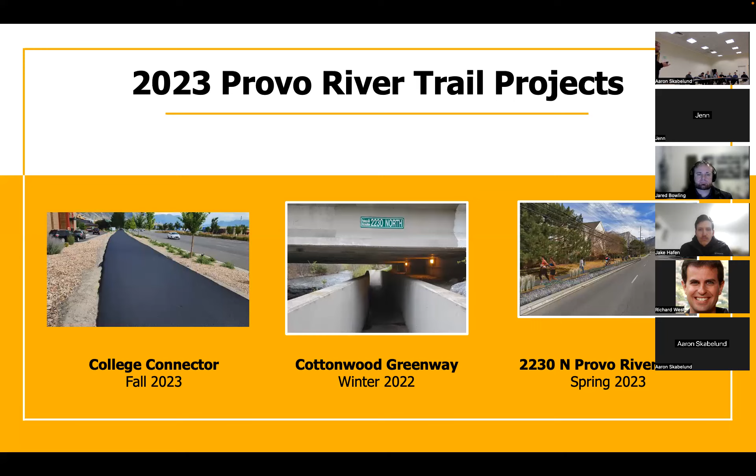Go ahead and advance the slide—we're going to wear your finger out going through these, no pressure, I'll keep it quick. So College Connector Trail is a half mile resurface. It's supposed to be really simple: grind off some asphalt on top, get rid of the cracks that were there, and lay down some fresh asphalt.

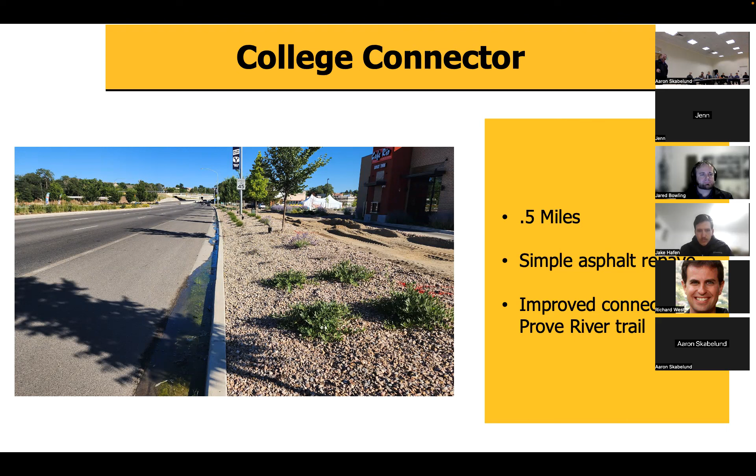But if you see in this picture, right here, there's a lot of water—been there a while. What was happening is the adjacent property owner had left the irrigation running for at least 30, 45 days. It saturated the ground, so when they went in and removed the asphalt, it rutted up the trail. Go to the next slide—another example of how rutted it was. These were like 2 foot deep ruts from the equipment that came in to remove that.

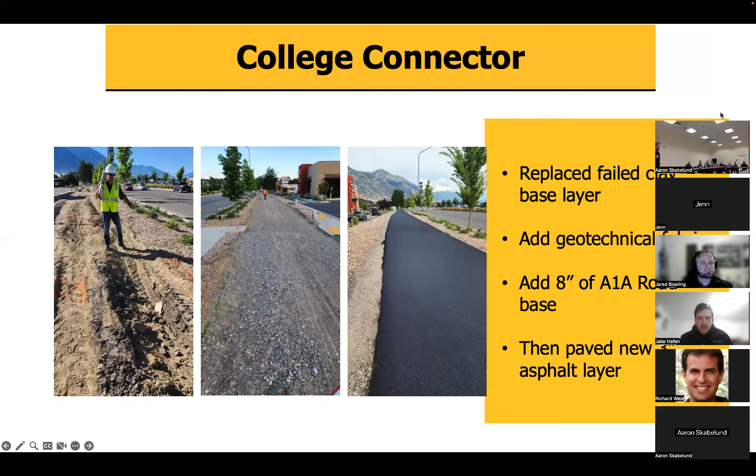We had some testing performed, and it required stabilization underneath the asphalt with geotechnical fabric and 8 inches of A1A class road base. Then we were able to come in and lay that fresh asphalt. Discovering that problem with the sub-base soils explained a lot of what you were seeing on top of the trail, cracking, because there's a lot of movement.

Sorry, where is this again? This is right up next to the Cafe Rio on University Parkway, where the new—we call it the mix, but they have another name for it—River's Edge, thank you. So I know the cracking happened there as well.

As you go south or east, there's also cracking. Is it because of the trees? Are you saying south of the bridge? Yeah, south of the bridge, like once you cross the river right there, southeast. I think you guys fixed it, but I'm just wondering, was that a tree issue?

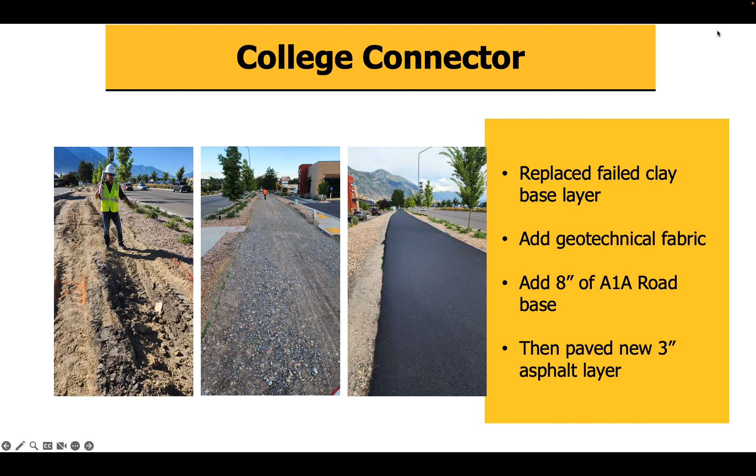I was on that this morning. My dentist is over there, so it's very... yeah.

So as part of that section, we created a new connection to the Provo River Trail. When you were headed south, you used to dive down right on the sharp right-hand turn right underneath the pedestrian bridge above you. We saw an opportunity to improve line of sight issues and ADA accessibility through here, so that we're now at grades less than 5% through this area.

Another design feature - I'll be honest, I saw this opportunity because I was out here multiple times before construction and saw people from Raintree just cutting across this section, across the lawn, to connect with College Connector Trail. They wore a beaten path, and it's like, that's where we need to put this connection.

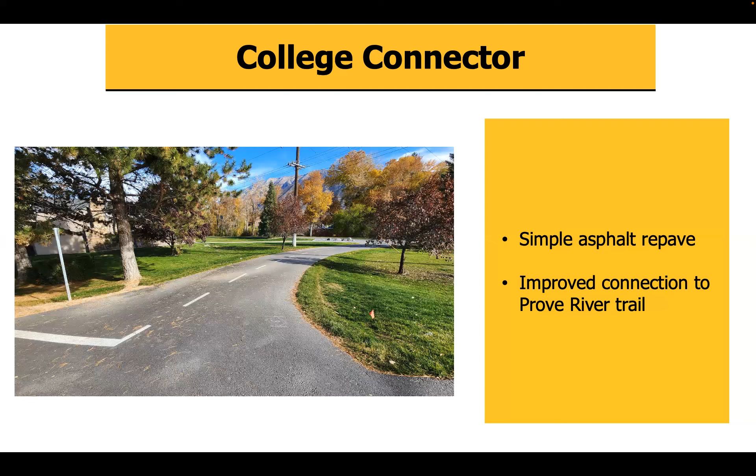So we follow the users. We're looking at our plans, but we're also looking at the real world to make these adjustments and bring it all together. Let's advance.

This one made sense because of the grades and such, and the connection that I'll show in a second on College Connector. So that's College Connector Trail.

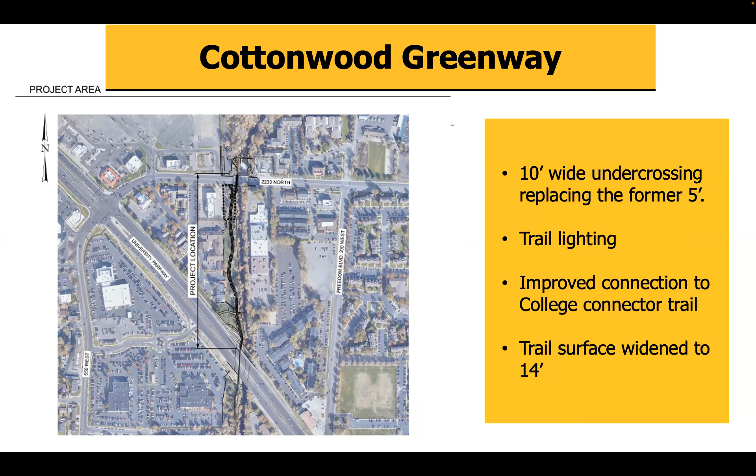So when we do these projects, there's a lot in the planning, a lot in the engineering. This is showing the north end of this project scope, with the crossing underneath the bridge of 2230 North along the river. There's a lot of stakeholders involved, and we're talking about the Provo River - it's not just Provo City, it's not just county, it's not just federal.

You've got multiple agencies involved with the environmental factors of the river, the wildlife, fish, canal, water share owners - all of those. There's so much that plays into this.

Our objective is to widen Provo River Trail to 14 feet with a shoulder on either side. In this particular section at 2230 North, we could not get that width because of the narrowness of the bridge and the river flows that needed to happen next to it. Let's go to the next slide.

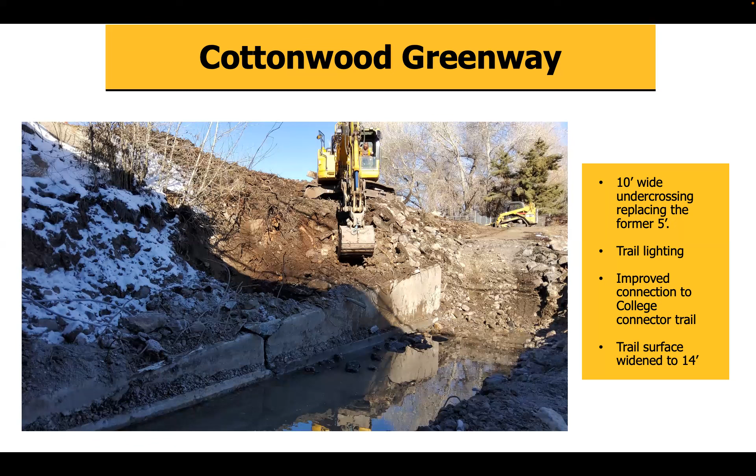This is with the old structure removed. We had to do quite a bit of engineering to shore up this bridge to keep it in place so it doesn't move. Not every bridge abutment is deep enough to do exactly what we want, so we had to drill into the hillside underneath the bridge abutments and stabilize it before we excavated to our depths, because another objective is to have at least 8-foot clearance overhead between the trail surface and the girders of the bridge above, or anything overhead of our trail system.

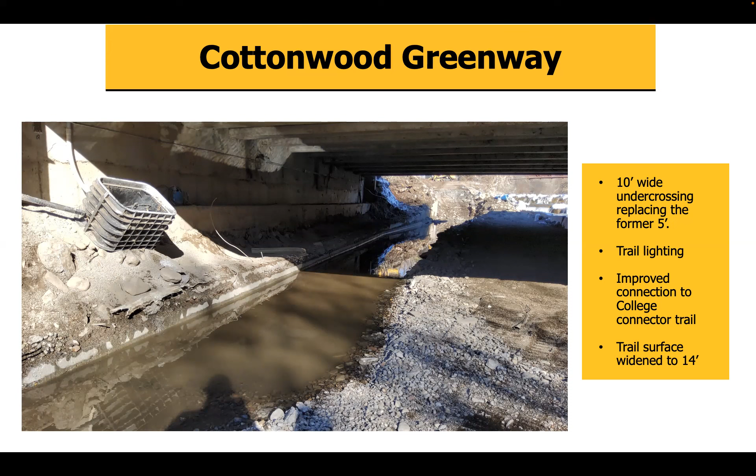Go to the next slide. What was the depth or height before? I think it was 5.5 feet wide, and the clearance was 6.5, maybe 6 foot 8. So we had to go down deeper to both build our structure that was improved underneath it, as well as increase the overhead clearance. Wow.

So this is what we have today. Let's just go through a couple of these.

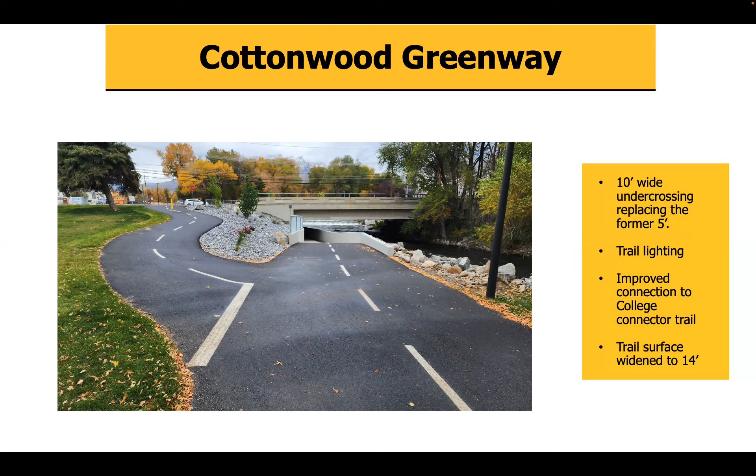This is the new intersection going out to College Connector here on the left. It's a 4-way - we have a 5th connection to this commercial building here, which we worked with these adjacent property owners to understand the connection to the trail system.

I didn't build anything they didn't want. They specifically requested only this connection. We worked with them to do some land exchange so that the trail is within Provo City property and not through their property.

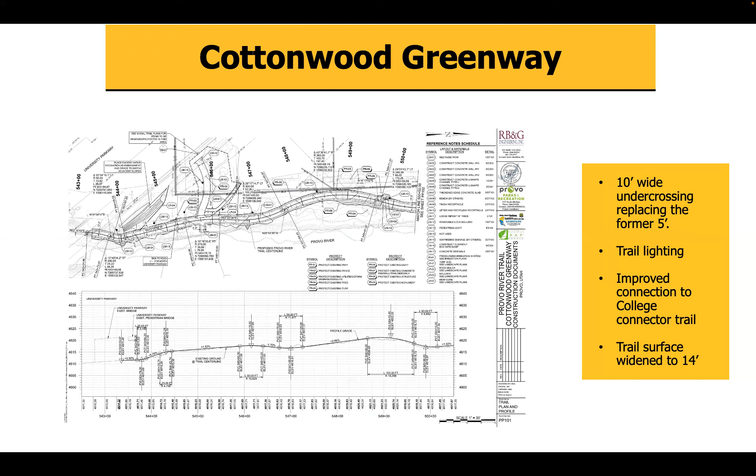Let's go next. This is the other project that was just adjacent to Cottonwood Greenway, and it goes to the north. It's a very long section of trail, 1.7 miles of surface to be replaced here. Next slide.

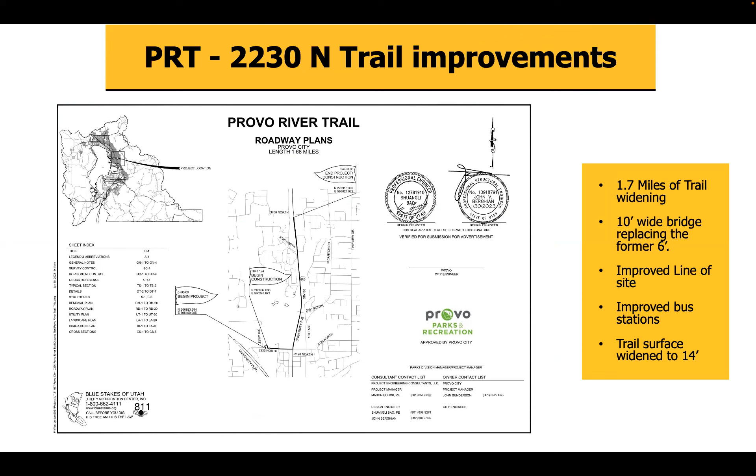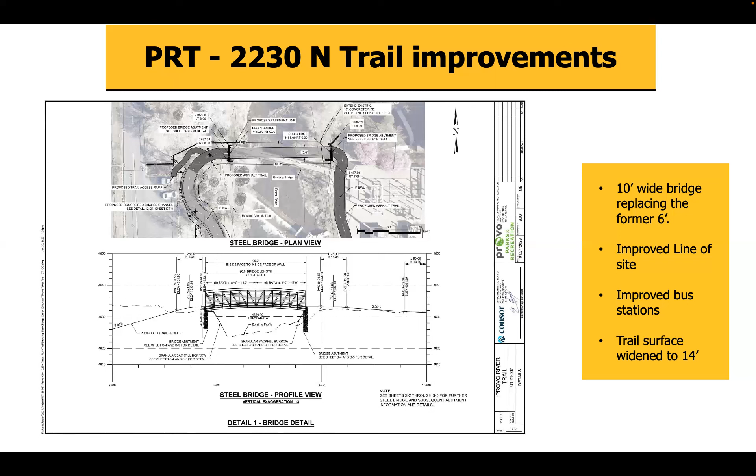Let's go to the next slide.

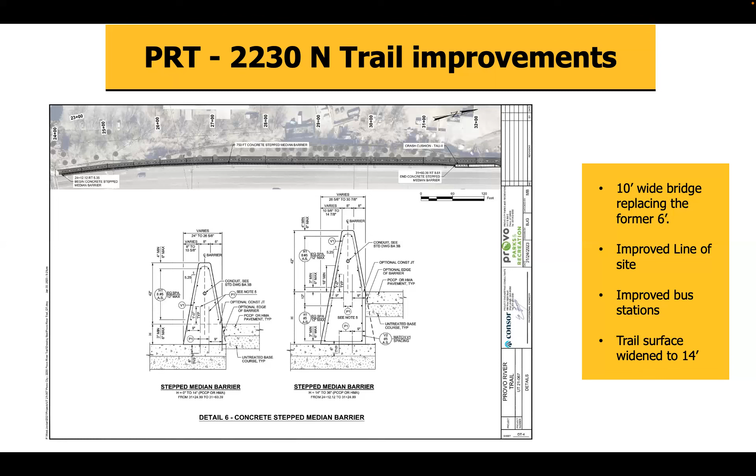Next slide. Can I just comment? I live right by that intersection, and I see accidents there all the time, so I really appreciate the safety measures. The one coming into the motion picture? 2230 and University, where you decreased the sidewalk? You see car collisions all the time there, or on the trail? Yeah, car collisions is what I'm talking about. So that separation helps. I've got a photo of it, we'll get to that in a second.

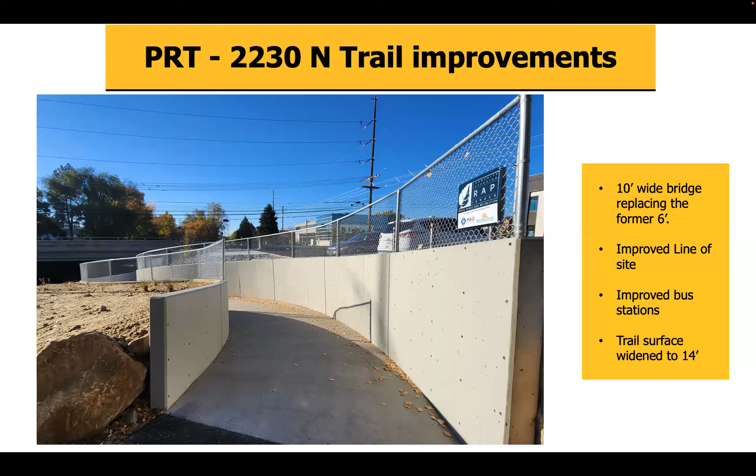As part of this improvement, the grade has to drop, and I wish I could get 5% slope on everything, but we have fixed points. We've got the depth we need to go underneath the bridge, and there's a pedestrian bridge up here with not a lot of run to get there. We've got parking lots next door and a river on the other side, so we're boxed in, but we did what we could to sweep it out and get a better approach angle and grade to the bridge. Before, it just came up through here with a right-hand turn. So we worked with BYU Motion Picture Studio for the property needed to do this.

And the bridge is much wider too, right? Yeah, great point, it's a 10-foot wide bridge. The other one is about 6. What is the grade? The grade at the steepest is 12%, and it was 22% before. That's an improvement.

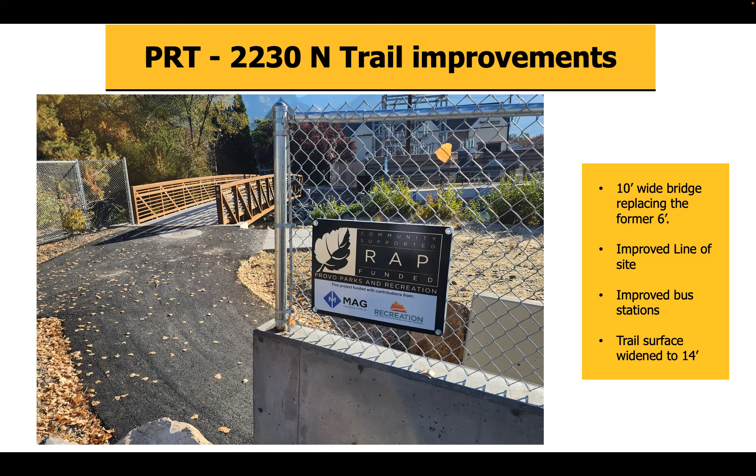This is a close-up of the bridge. We went from a wood deck to a concrete deck, which allows our maintenance team to use our plow equipment on the trail and get right across this instead of having to hand shovel the wood plank decks. This has now become a new standard.

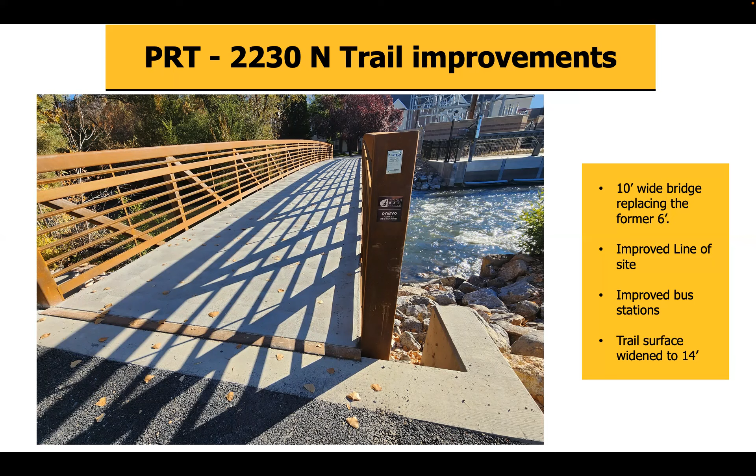And it notes improved bus stations. Oh, that's another thing—I'm sorry, I just copied this slide and changed the pictures. There's a new repair station here, right in front of Motion Picture Studios. Again, there's that U-channel below it.

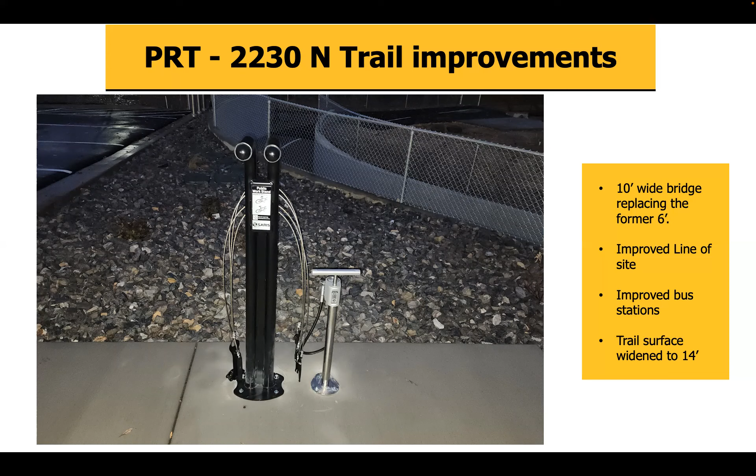Some picnic table pads were added in that area too, because it's a great spot to use as a trailhead—take a break if you're on a stretch of the trail already. There's some good eateries in that area too, with commercial development in River's Edge.

So this is that median barrier wall, and you can see our grade, we didn't have to build this up. The sidewalk used to be right about here. If I was to widen that surface, I would have had to push a lot of dirt out here and steepen the grade coming down that wall. I had no engineering on that wall to be able to do that, so we instead dropped the grade of the trail down and were able to get the widths we could get.

The narrowness here at the BYU tunnel was a fixed point. I couldn't go any lower because there's a structure underneath it. But after that, we flare out to 12 foot. I think right down here was 8 foot, but the contractor only had 7 foot 8 inches, so if it goes back, widen it to 8 foot. That was a design criteria to get that width right down here, carried to the fence, and then it flares out to 10 foot and then to 12 foot eventually until we get past the north of the Riverside Country Club entrance, then it goes to 14.

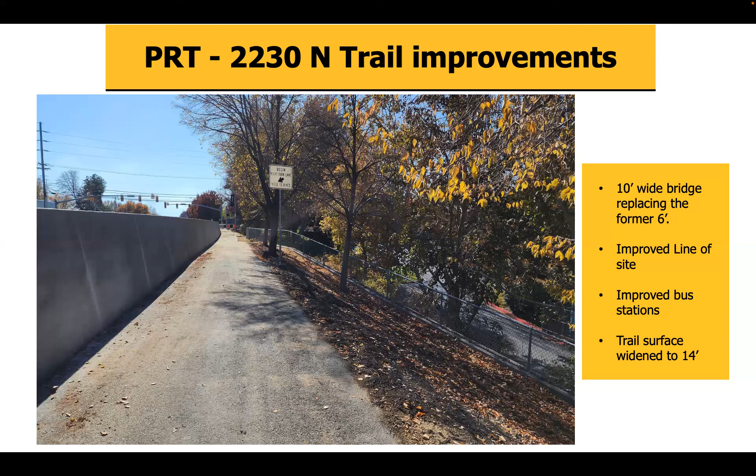Let's go through next. This is the bus station. Look at that. So what we did is I included in the contract to improve the bus stops from just a post. This one had a shelter on it and they're replacing it, I don't know if it's been replaced yet. But the two other points at 3300 North and 3700 North did not have bus shelters or pads, it was just a post in the ground. We worked with UTA, they are providing the shelters, and we provided a pad for them to build on. So those improvements happened at the same time as the trail.

We had to work with the Riverside Country Club to relocate their fence back to accommodate the trail. They were a very good stakeholder and partner in this improvement. They let us tear up their frontage and put things back as best as our design had laid out.

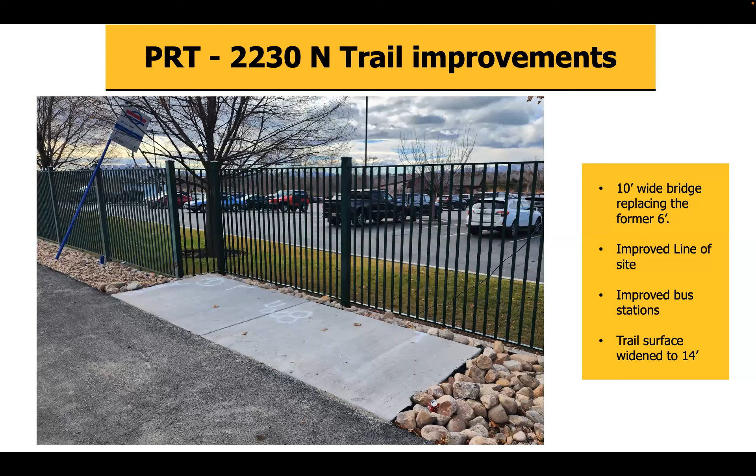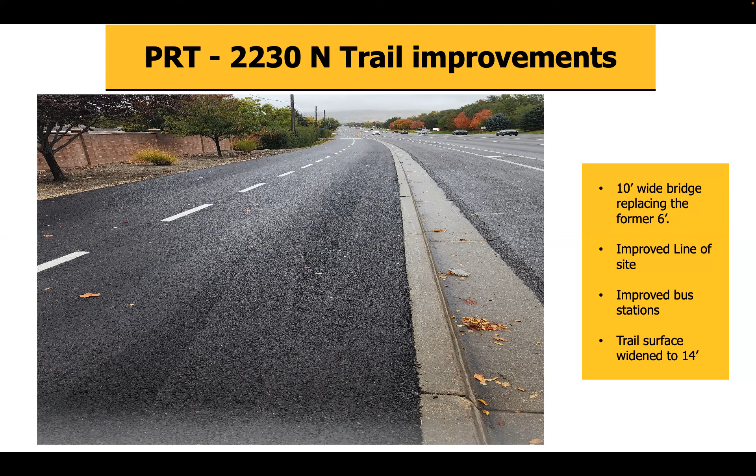This is looking to the north, just past Riverside Country Club with the condos to the north of it. And I got one more photo for this section. A gorgeous place to live, with great access to this trail. I love the hornbeam trees that are here for St. James.

So there's where we've been this year. We've been busy. Besides these projects, we have the regional sports park under construction. We had improvements made at Rotary Park, improvements at Riverview Park, and improvements at Rock Canyon Park that took place this past calendar year.

Most of them funded in partnerships with our grant funding sources and RAP tax funds. What does the RAP stand for? Recreation, arts, and parks. No.

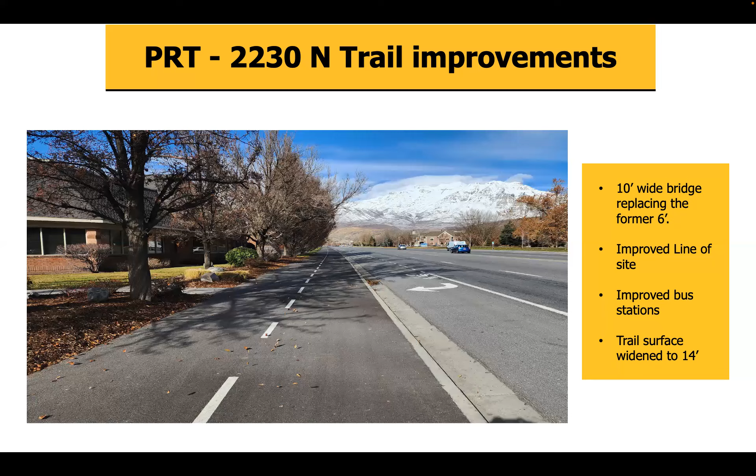Let's go next, I don't want to ever leave these out. The lighting improvements, this is on Cottonwood Greenway, but we've got 61 fixtures on the trail now that are solar powered overhead lighting on the trail. We'll continue to do more as funds are available and or budgeted in the projects, which we have another project this year that's currently budgeted in, but we'll know definitively when we let the contract.

Let's go to the next slide. So this is what's coming up. There's more, but these are specifically trail, Provo River Trail related. The one I left off here is Rock Canyon Trailhead, which is receiving a huge improvement this year with expansion of the parking area, replacement of the restroom, amphitheater areas, and addition of several trails. Kind of like with the 2230 North Connector, we're inviting UTA to put a bus station at the trailhead, and we have an area that we're allocating for that.

Why is the amphitheater and restroom area being redone? The primary reason for the restroom replacement is that the building is not built as a year-round facility, and it is not sized capacity-wise for the use that it's experiencing and will experience in the future. So we are building at this site a year-round restroom facility with the appropriate heating mechanisms to keep the water from freezing inside the building, and it's sized differently.

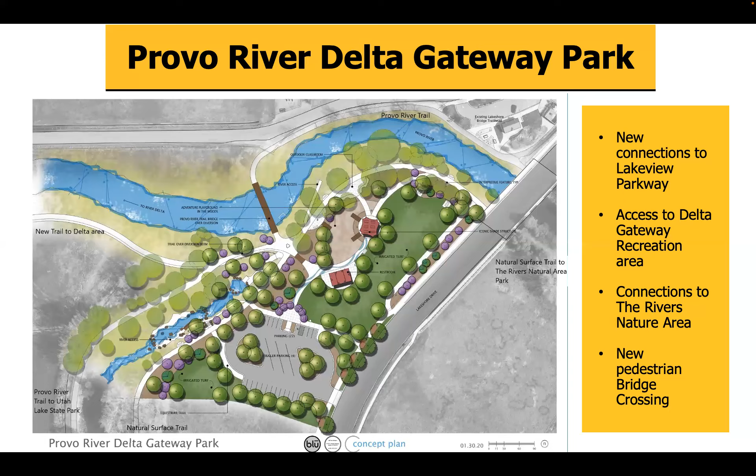Let's go to the next slide, because I feel like I'm burning your guys' time. This is just a slide showing all those new trails. There's a river, and there will be a new trail in the north. This is a new trail, and then we'll connect to existing. Let's go to the next slide.

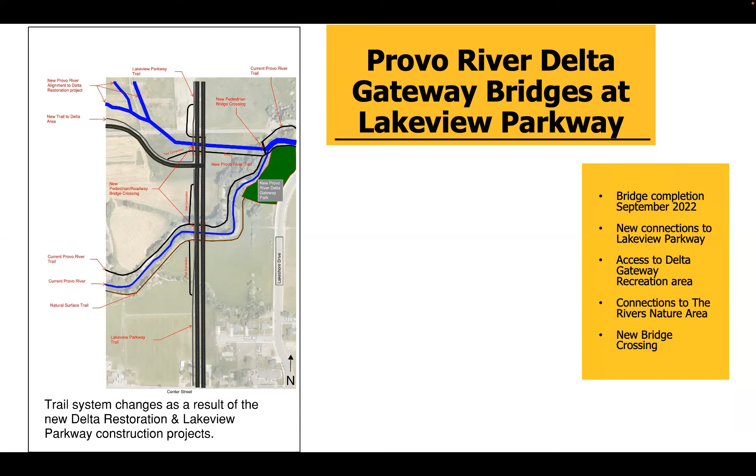So of particular interest to this group too is the connection to former Bulldog, now Cougar Boulevard - let's come back to that. Will you talk about that though? I'm sure that will be of interest. Okay, let's go to the next slide.

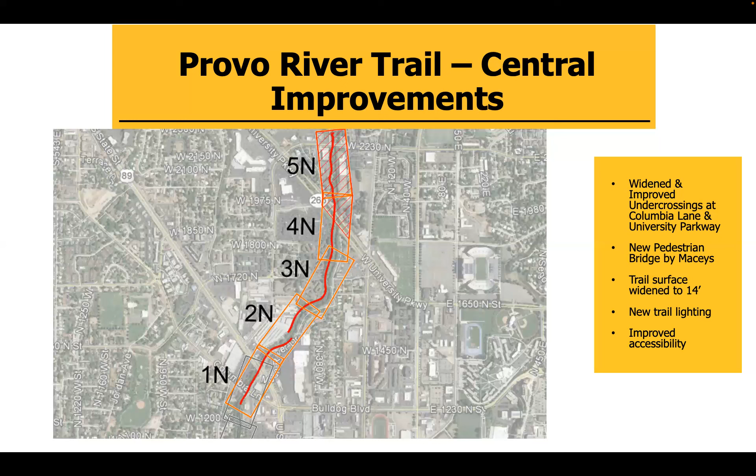Also improving the head clearance underneath, and the grades in and out, which are very difficult to accomplish. Again, with what I relayed at 2230 North, we have fixed objects we're connecting to - we've got to go under a bridge, come back up, and go under a second bridge. It's really tough to hold the wall, building the retaining walls and everything to do that.

So would the Columbia Lane trail be going northeastward, a little bit wider underneath the bridge? Because you can't really go anywhere to the right. Correct. So the pinch I had under 2230 North is that I couldn't go underneath the bridge any further into the river.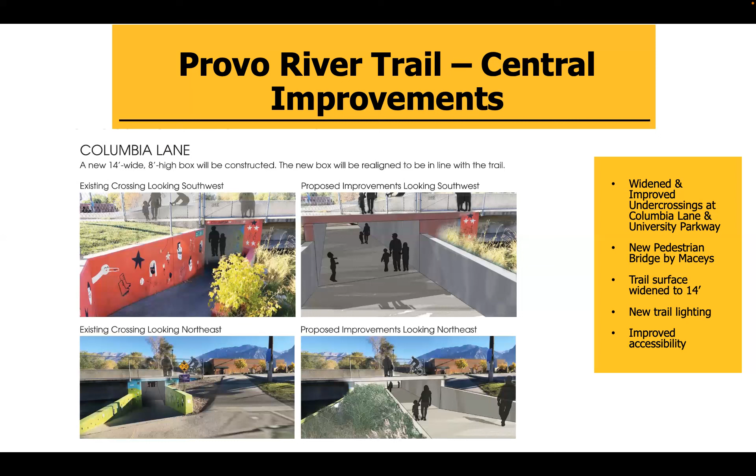On the south side of Columbia Lane, there is a design ramp to come down, near Exchange Park, right next to the fire station. That stays, but it gets improved - the grades get improved.

Will you be biting into Walgreens at all? That's a great question, and I'll answer it in a minute. Because where this is shown on the north side of Columbia Lane, I am on the property line with this section and not going into Walgreens property.

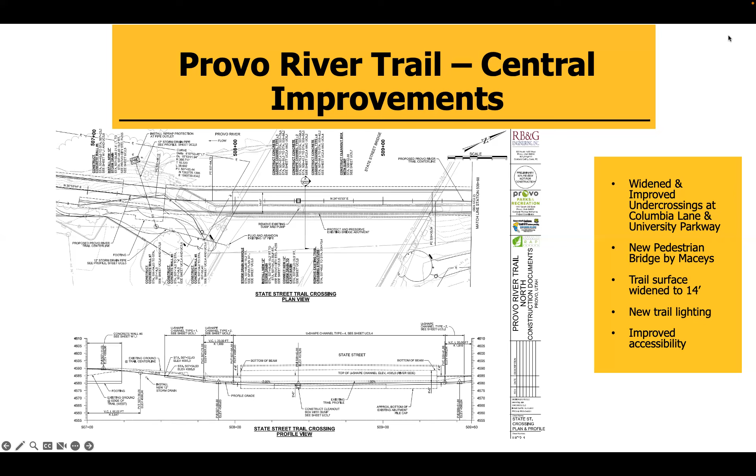Skipper Bay, I think it's gone. I think the federal project removed that so they could have more water channels going out to the lake for their Delta project, for the fish. Sounds like that's been removed, Rick - that's no longer the north section going. Oh, the north section, I think.

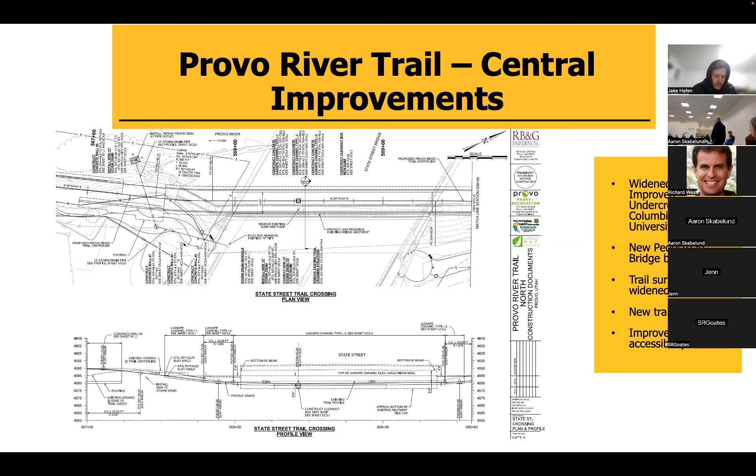You might be able to get, especially if you know - I really appreciate the work that John has done. We've had a couple of preliminary trips out there, site visits, using the paper, the detail - it's very good to work with. And I have full confidence in John that he's going to get on top of it. He's such a nice guy.